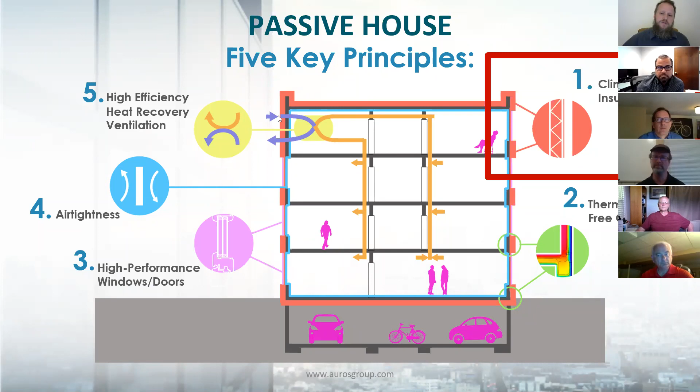So this week we're going to start with the first one, continuous insulation, and every 2 weeks we're going to do the remaining of those topics. And then after those topics are done, we're going to get on to something else, something we've either figured out folks are interested in learning, or we just decide on the next thing we'll talk about.

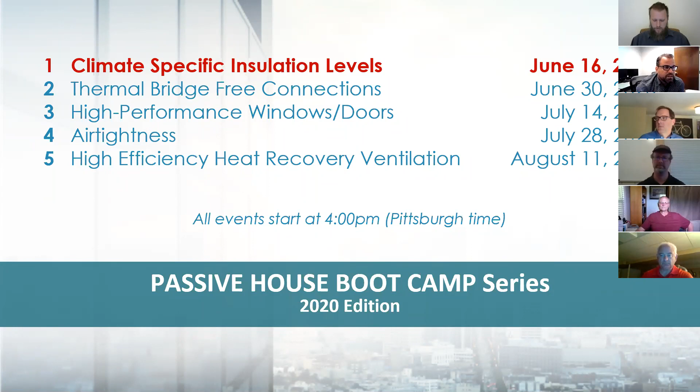The next presentation we have is built around thermal bridge-free connections. We have someone who is a Passive House certifier, highly trained not just for CPHD but also certification, and they'll show us some hygrothermal and thermal bridge analysis. We'll roll our sleeves up, look at some assemblies, bring it in, and play with it. That's intended to be a learning exercise, like hopefully today will be. So with that said, today is about continuous insulation and the thermal barrier. I will give screen back to Rob.

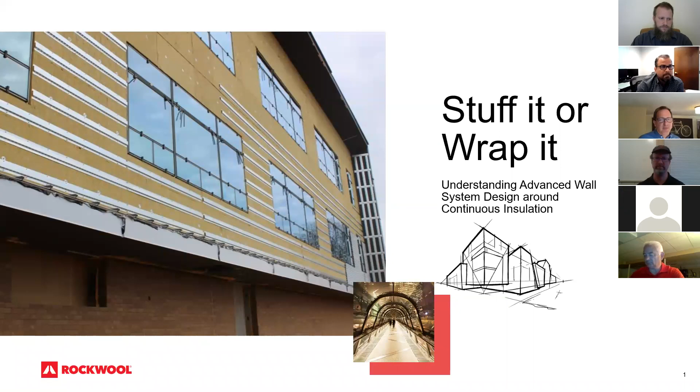We're here today to talk to you about understanding advanced wall system design around continuous insulation. We'll touch upon not only the continuous insulation aspect, but also air tightness and avoiding thermal bridges. I'm going to jump right into it so we can try and stay to 15 minutes, then you can pepper me with questions afterwards. This presentation is an excerpt from our full CEU that we developed with John Straub from RDH Building Science, so I've made it skeletal, trying to touch upon the points I think are most important for this audience.

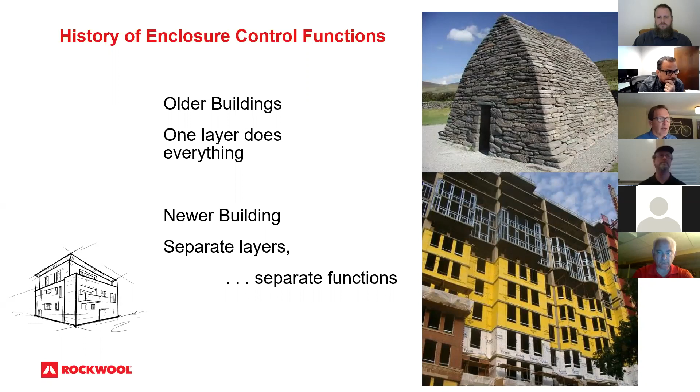When we look at building enclosure and control functions, we look back first. Hopefully we're all learning from our mistakes, even the ones from 1,000 years ago. Older buildings, like old stack stone masonry, had one building system that theoretically assumes all the functions we want: thermal control to some small degree, air control, water control, and vapor control. Of course, now the way we build is a bit different. We've got a ferroconcrete core, a substructure of LGMF that holds the sheathing, and then ultimately all these control functions that we've separated out, sometimes in one product, sometimes in a bunch.

We want to hit that 0.4 CFM for our blower door test. And then we look at thermal control. What I found over the years, working as a consultant and as a project manager, mostly doing design assist, is that all these products we use on the exterior substrate really rely on adhesion.

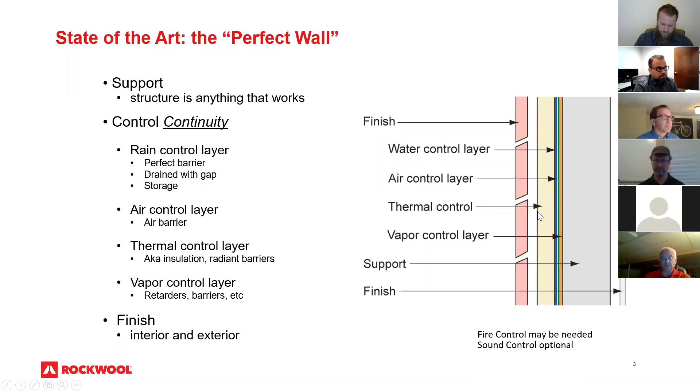So why are we doing thermal control? From a passive house perspective, it's about not only thermal comfort, but also air quality and keeping our spaces quiet. As we do those things well with our thermal barrier, hopefully we're also keeping surfaces at a moderate temperature.

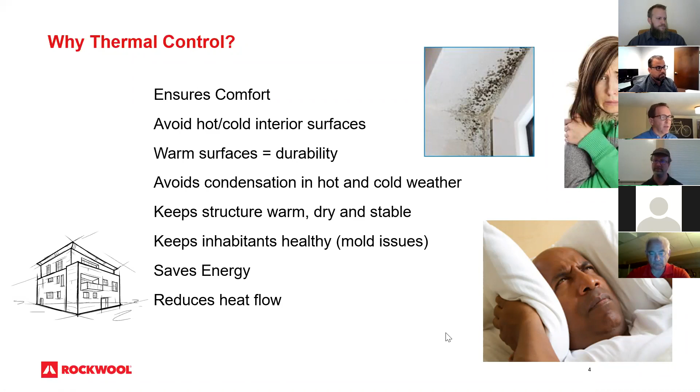We don't want exceptionally hot or cold surfaces, especially when it comes to our metal studs. If we have cold studs and hot moist air, that means we possibly have condensation in our wall sections, and this black icky stuff, or the degradation of the build itself. We see studs corroding or rotting depending on the material. But ultimately, if we're doing all that well, we should be saving energy and reducing heat flow.

When we look at thermal controls and the most important aspects of it, we see the movement of energy through our wall sections in three different ways. Conduction is the biggest one—thermal bridging. So those studs, our structural steel, our slab edges—the more dense the material, typically, the bigger a bridge of heat it is.

Then we look at convection—our air tightness. Second law of thermodynamics: heat's always moving to cold, wet's always moving to dry. When it does, it's taking energy along with it.

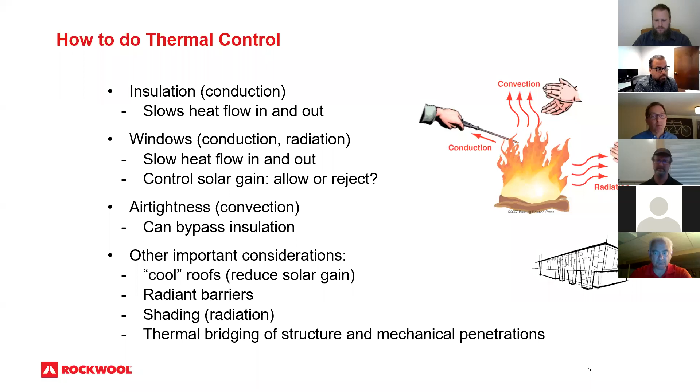And then thirdly, radiation—line of sight gain. Not as much a topic for this conversation, but certainly something we think about when we design. How do we face our buildings? Do we use passive shading measures? Are we using low emissivity coating? Or maybe not—maybe we want to benefit from that solar gain with a truly passive design in some instance.

So then we look at rated R value, or our overall thermal resistance terminology. Rated R value is this nominal theoretical static number set at 75 degrees. It doesn't do much for us except tell us what this material is doing at one temperature at one time.

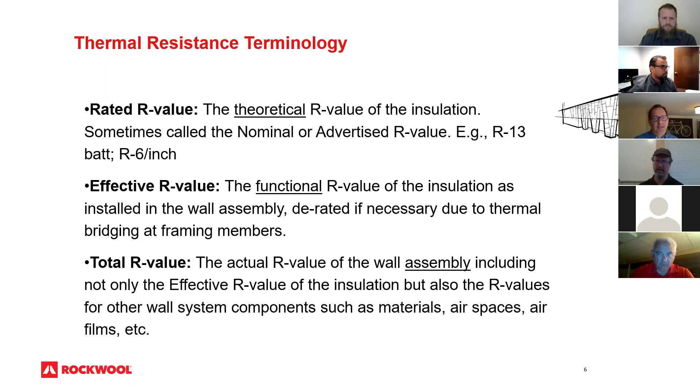We put that nominal value into use—we put it in a wall section. And then we realize, okay, we're derating this material for what's around it. How much thermal bridging is affecting that thermal barrier? Ultimately what we want to look at is our total R value—that effective R value, also taking into account all the other pieces and parts of the wall, our air films, our air spaces, the gypboard. That aggregate number is what we want to look at, our total R value.

When we look at that aggregate number and where we want to put our nominal R value—this is the nickname for the presentation that Dr. Straube gave it: stuff it or wrap it. Do we stuff it in the inner wall cavity, or do we wrap the building in that thermal barrier? The spoiler alert is that the answer is wrap it, not stuff it. But it's not always that simple either.

Oftentimes we're designing in urban environments. We have limited space—on the outside, a lot line and a setback, and on the inside, a client wants every bit of programming space they can get out of their dollar. So we've got some decisions to make.

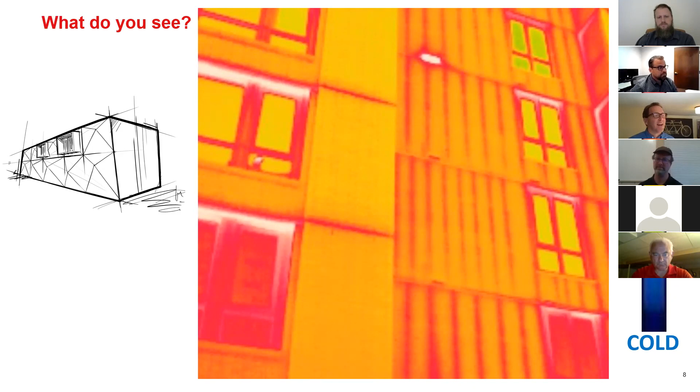The first thing we look at is thermal bridging. We look at some infrared imagery from a building in New York, maybe six or seven code cycles ago. Clearly no continuous insulation—we can see all that loss in the red and the yellow. The studs, the window frames, which clearly are not thermally improved.

Our relieving angle on that masonry column—all of those are big culprits for loss. As we moved along, maybe now three code cycles ago, we're looking at the use of some continuous insulation, the basics from ASHRAE—probably an R10 on the outside, the use of a non-continuous attachment system, so clips instead of rails, or instead of continuous Z-shapes. We can still see the trace of that slab edge conducting heat, and the surface penetrations, which aren't thermally broken. Then, of course, for some reason on the left side of this elevation, we see some continuous Zs, and that shows it takes that heat straight through the studs, right out through the Zs.

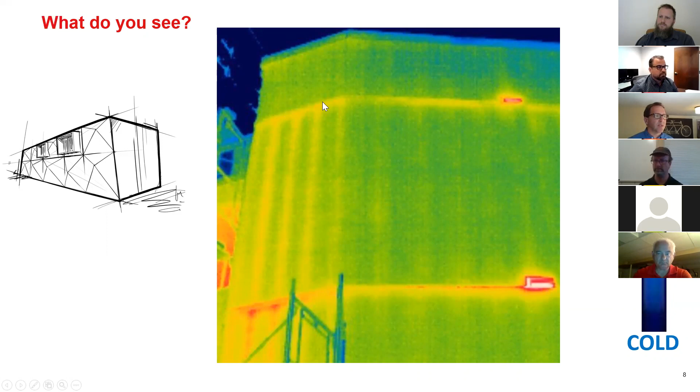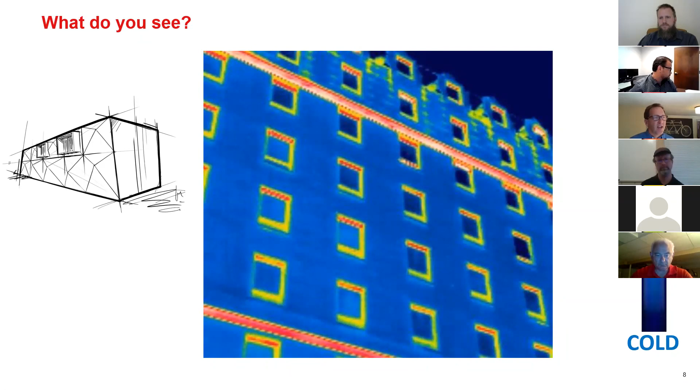This is actually an EIFS building. I don't typically promote or applaud EIFS as a solution, but it's really the first iteration of an effective continuous insulation solution. Of course, it worked a little better in the EU than it did here, at least in terms of details, and we can talk about the nuts and bolts of that later on.

So when we look at thermal bridging and what its real effect is, if we take our very typical commercial build, 16 on center LGMF studs, 2x6 wall, we can fit an R23 bat product in there. But if we derate it, what we actually have, our effective R value there is an R10. So not highly effective to use that thermal barrier in that inner wall cavity.

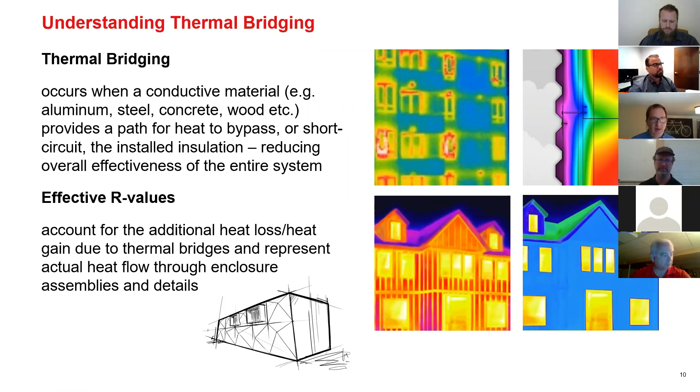Even with a residential build with wood construction, we still see up to 25% loss. And then we start to take account for the rest of the structure, right? All of this steel, we know that we can't get to the numbers, whether we're talking about basic code or let alone passive house levels, by only using that thermal barrier inside.

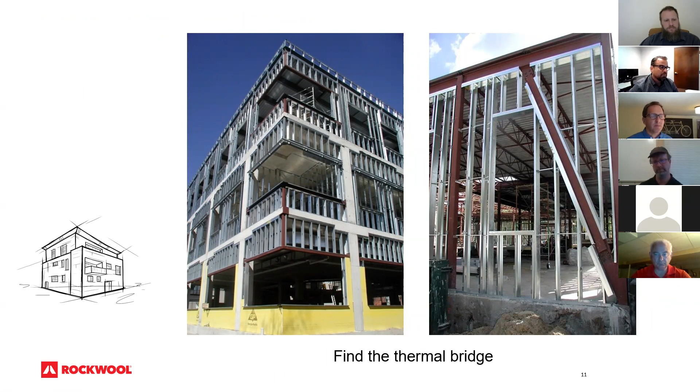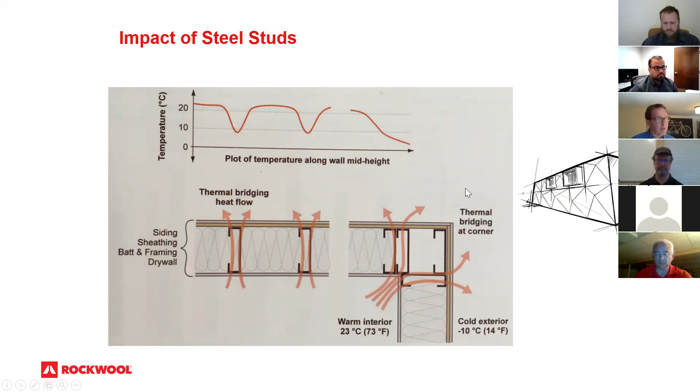So clearly, we have to use some continuous insulation to make this work. When we look at the impact of using that continuous insulation, if we use as a starting point the best we could do by filling the wall full of insulation, and then start to add continuous insulation on the outside, what we find is that as we buy continuous insulation, we actually get more than we buy, because we're improving the performance of the insulation on the inner part of the wall.

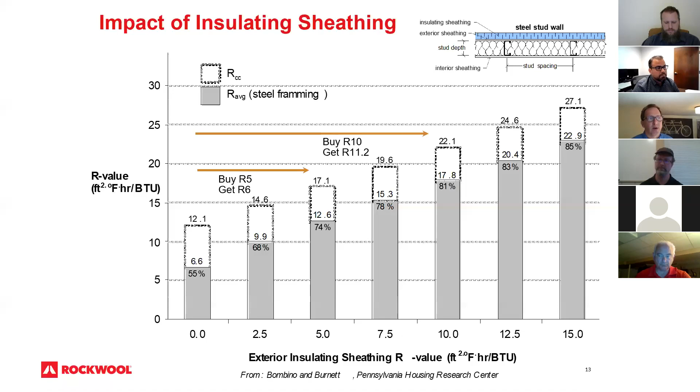So if we're buying R5, we're actually getting an effective R6. If we're buying R10, we're getting 11.2. And that curve keeps on going, and it really doesn't flatten out until we're well into passive house values in terms of insulation in the R50, R60 range. So the message here is that effective R value is the performance of the entire assembly, not just the material.

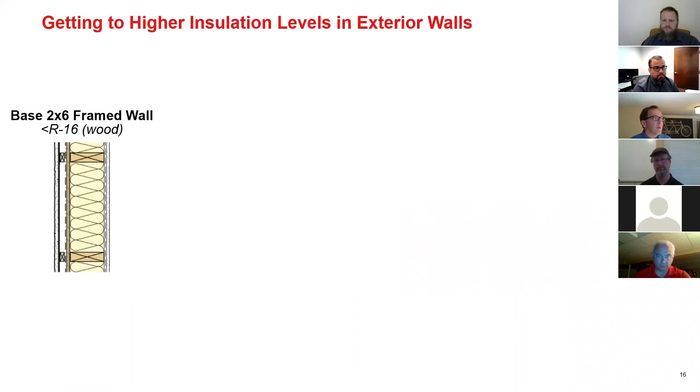As we start to look at getting to higher insulation levels and look at some different solutions, we've got a number of things to consider when we're using exterior insulation. What is its permeability? If we're talking about a typical passive house detail with a double stud wall and a lot of dense packed cellulose, we need to be aware of what's happening with moisture there.

If we're doing adaptive retrofits or adaptive reuses and we're insulating formerly uninsulated masonry walls, what's happening with that moisture, and at what point, especially in the winter, is that moisture getting trapped in those scenarios and potentially becoming destructive? And then what we typically see for a highly insulated wall is this split insulation scenario.

So we've got some rules of thumb on ratios of effective R value inside and out, as well as definitely a need to use a vapor permeable membrane between those two assemblies.

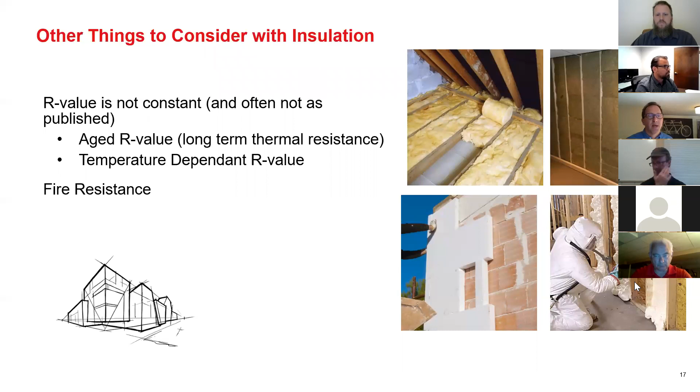Other things to consider specific to insulation are that R value isn't constant, right? As I said, it's established at 75 degrees, but as temperature changes, R value typically goes up with the exception of a couple of materials. Also aged R value, there is thermal drift, so some materials' R value changes over time. And then of course, depending on what we select for material, fire resistance is a big component.

When we're talking about the exterior insulation, that continuous insulation, we're usually talking about stone wool, polyisocyanurate, or extruded polystyrene. In some cases, also looking at Gutex or something like that, but these are the big three that we see in commercial builds.

What we find is that materials that are fibrous insulation get their R value from trapping air. Rock wool does, Gutex does, other mineral fibers do, but thermoplastics get a piece of their R value from blowing agents in the manufacturing process. Over time, those blowing agents either off gas or phase change, and when they do, their efficacy changes. So ultimately, we all kind of live in the same effective R value boat.

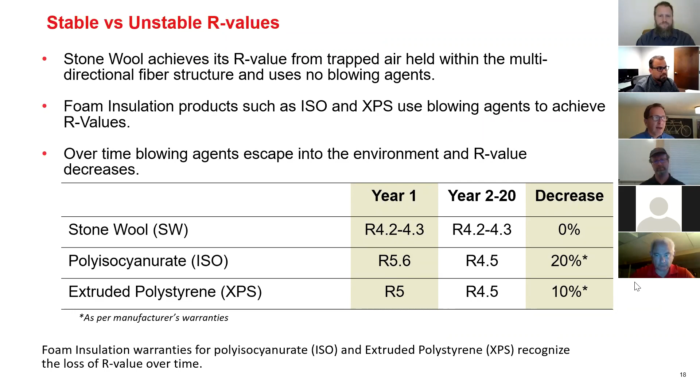This is just a little bit of excerpted warranty language from thermoplastic manufacturers and thermoset manufacturers on what to expect in the long term with those materials. I'm going to let Michael speak to the roofing aspect of this, because it's a little bit different, a different animal, and more in his wheelhouse in terms of expertise.

Robert's already kind of set the table on the performance of foam plastics versus that of those products that trap air. As commissioning started to come into play, the National Roofing Contractors Association took it upon themselves to test foam plastic, specifically polyisocyanurate foam, but rather than at just 75 degrees mean Fahrenheit, they tested it using ASTM C518, which measures thermal performance at 25, 40, 75, and 110.

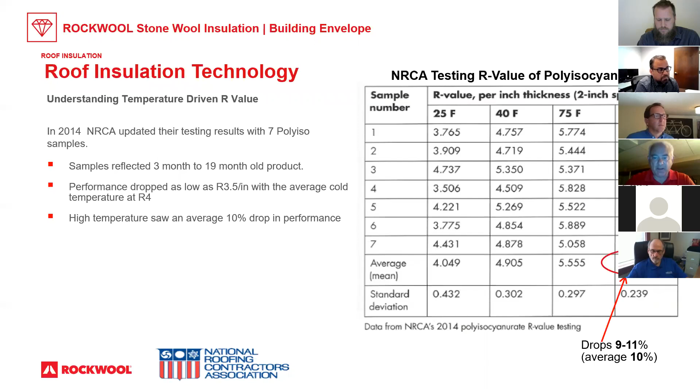If I take this chart and graph it, what you're going to see is basically the sweet spot for foam plastic at 75 degrees, providing an R value of 5.6 to 5.7. Stone wool for the roof is around 3.8, for the walls more like 4.3. But as temperature changes, you'll notice those lines basically cross. At 25 degrees, stone wool actually outperforms isocyanurate foam. So for passive house construction, when you're looking at long-term performance, it obviously makes more sense to use something that traps air versus a foam plastic.

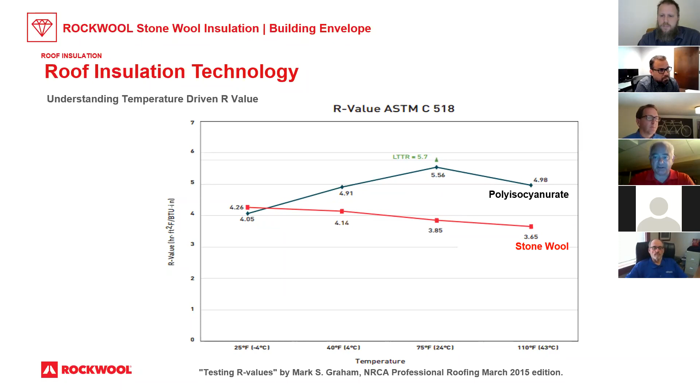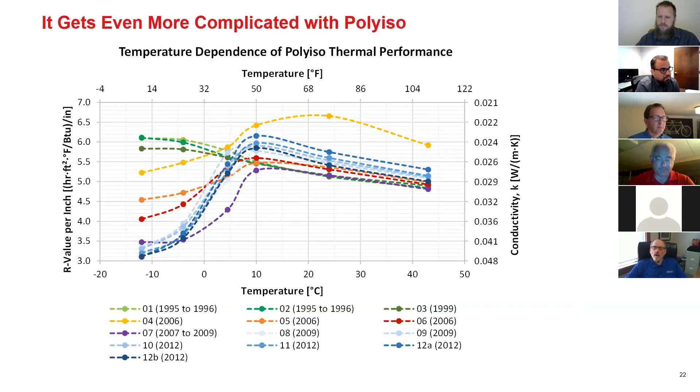So as we look at this, it's not just thermal barrier. As we start adding more and more thermal barrier, we need to think of what the rest of the assembly looks like. For passive house, that typically looks like a drain rain screen assembly. We know that we need a good continuous plane of drainage to control water, and to pay close attention to those penetrations and openings where we have transitions.

That also contributes to good air tightness. We also want to allow for maximum drying potential of that wall in case of heavy weather events, or accidental introduction of water. So we want, ideally, vapor permeable products for that thermal barrier. As we're providing that continuous insulation and good continuous air barrier, we should be doing a good job of controlling condensation problems and decreasing our energy consumption.

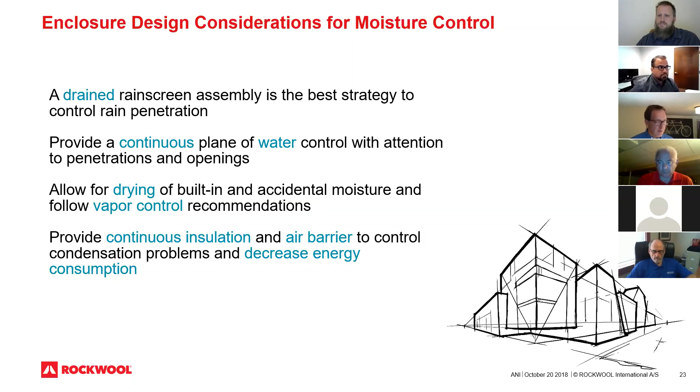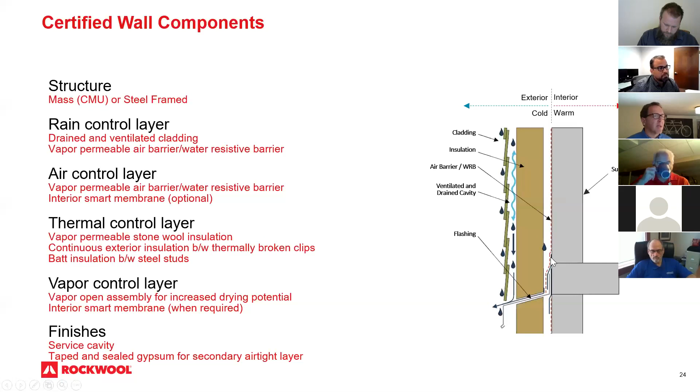The one thing I want to throw out there, and we can talk about this in a little more detail in Q&A, is that if we have a split insulation scenario, we want to make sure that the water-resistive barrier behind the insulation is something that's vapor permeable. We can talk a little bit more in detail about that as we move on.

So we'll quickly look at choosing a cladding attachment system. There's no sense in putting a ton of insulation on your building if you choose cladding attachment systems that are going to allow a ton of thermal bridging, right? So we'll look at masonry real quickly. We see a transition from the use of carbon steel brick ties to stainless steel brick ties. They're about half as conductive as carbon steel, so 100% more efficient.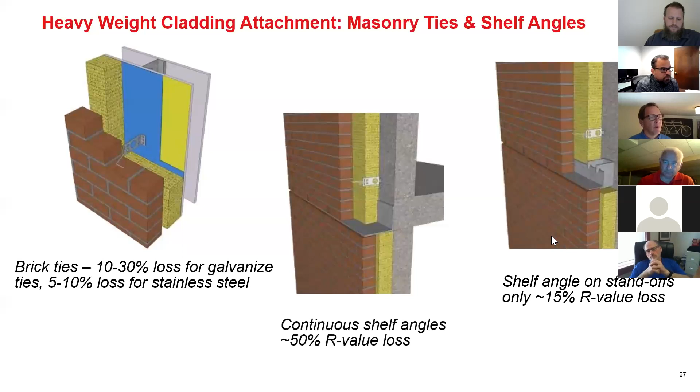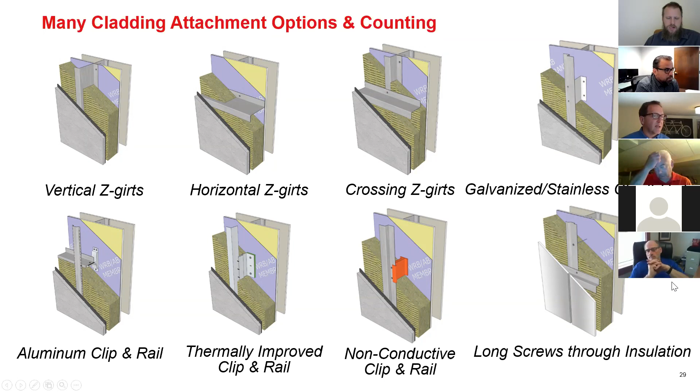Those continuous shelf angles, which are good for 50% aggregate loss, not just localized loss, have been replaced with the typical shelf angle standoff or a thermally broken structural element. When we look at all these different cladding options, these are kind of the top row here, the old school continuous rails, and even down to aluminum clip and rail systems are relatively inefficient. We're going to look at these three thermally broken and screw-through systems as the more efficient options.

What we need to know about those as options is if we're using a clip and rail system of any kind, the material that we use with it, the insulation material, wants to be semi-rigid so that it can conform around all those details of hardware, or spray foam, not as typical in this marketplace, but every once in a while I see spray foam on the outside of a building.

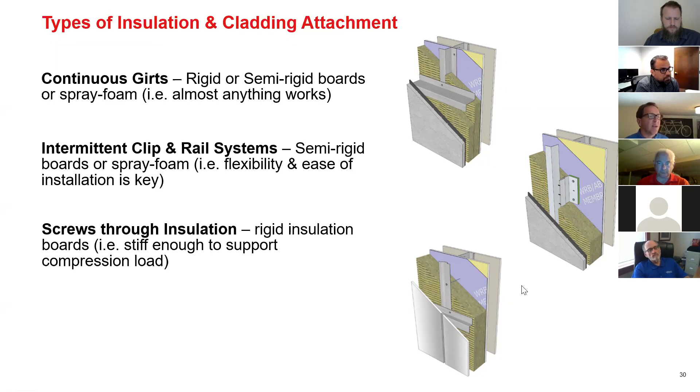And then if we're looking at a screw-through insulation, so the only thing going through that insulation is the fasteners for a girt system, we need to make sure that that material is rigid enough to handle the, has enough compressive strength to handle the load that we're applying to it.

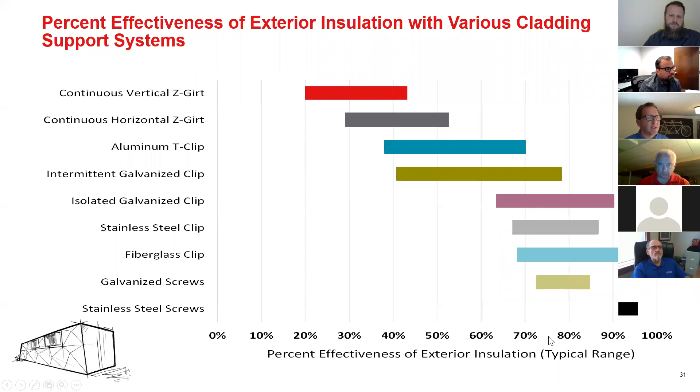And this is a real basic rundown of what each of those assemblies looks like in terms of efficiency. And we see a big spread in all these because of the amount of clips that you might have to use to accommodate the load.

So we look at clip and rail systems. This one's from Knight, it's their MFI system, so somewhere between 60 and 90% efficiency. And as I said before, the difference in efficiency revolves around how many of these clips are we using. The more metal we pass through that insulative barrier, the less efficient it is.

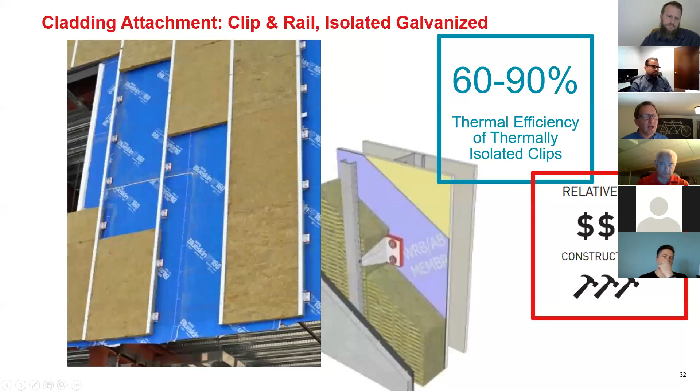So heavier loads are going to be less efficient. We also put in a relative cost factor, and then more dollars means more dollars, and more hammers means easier to build.

We look at fiberglass clip and rail systems. This one happens to be Cascadia, there are a few others out there. You probably know Cascadia in the passive house world because oftentimes their windows are looked at along with these clips because they don't use aluminum, they use these pultrusions, and they have much higher R values than typical fenestration. But what we see is 70 to 95% efficiency, about the same relative cost and constructability as typical clips.

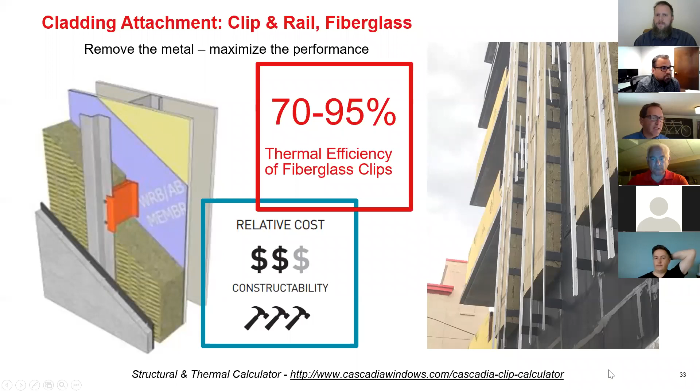And they do have a pretty interesting tool on their website where you can do a clip calculator that allows you to turn the knobs of your R value, your cladding weight, and the amount of clips that it's going to take to get you there, which then again also informs the levels of efficiency.

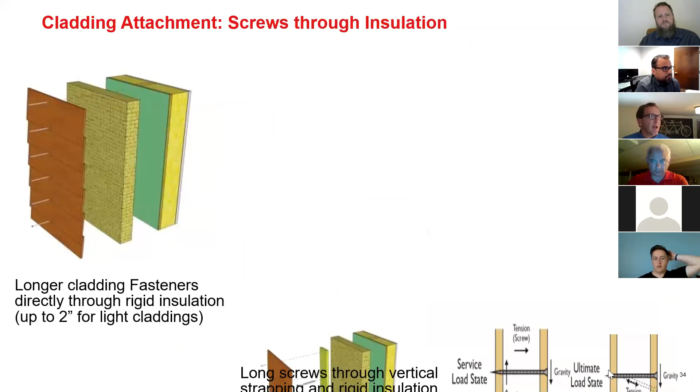And then when we look at screw-through systems, we have a couple different options. So a very light cladding, a residential type application, fiber cement plank type system, we can go right through the plank, right through 2 inches of rigid insulation, or right into the substrate.

Anything heavier than 5 pounds a square foot wants to utilize a vertical girt. That vertical girt, in conjunction with those fasteners, basically becomes a ladder truss. So that's how it's able to assume higher loads. So we can load up to 15 pounds a square foot.

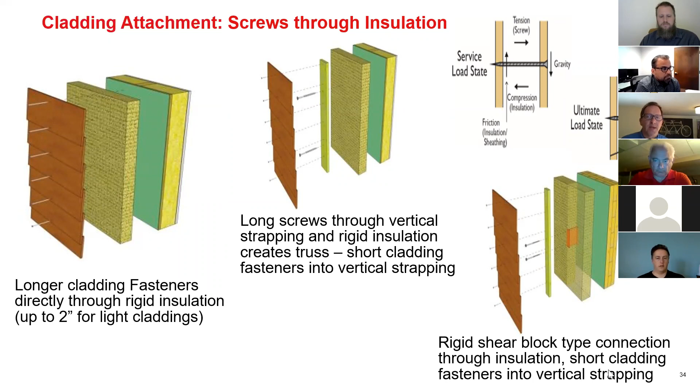And anything above that probably wants to look at using a rigid shear block. For my money, I'd probably go back to a clip and rail system rather than try to incorporate a rigid shear block in a screw-through system. But these are the levels of efficiency that we see.

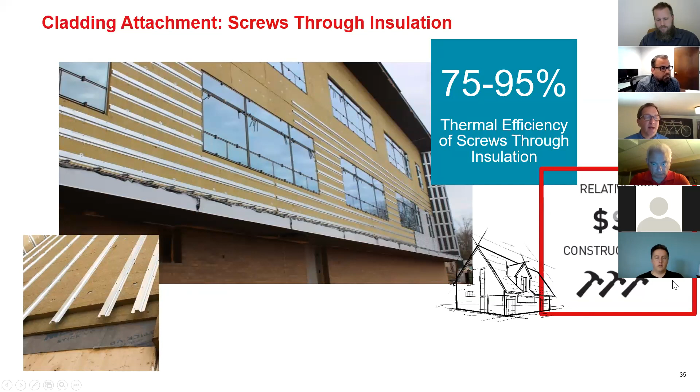So up to 95%, the 95% end of things is informed by the amount of fasteners. We do see thermal conductivity through those fasteners because they're pretty robust, anywhere between 3/16 and 5/16 of an inch. But we also see a relative cost drop because we've eliminated a layer of hardware. And in terms of constructability, it's really not a heck of a lot different than what we see with the typical clip and rail systems.

And then a real basic metric, what is our backup that we're attaching to? Are we going to wood? Are we doing mid-rise wood, typical steel stud backup, or unitizing and going to concrete or block backup? And then what's the weight of the system that we'd like to attach, and some best practices on that.

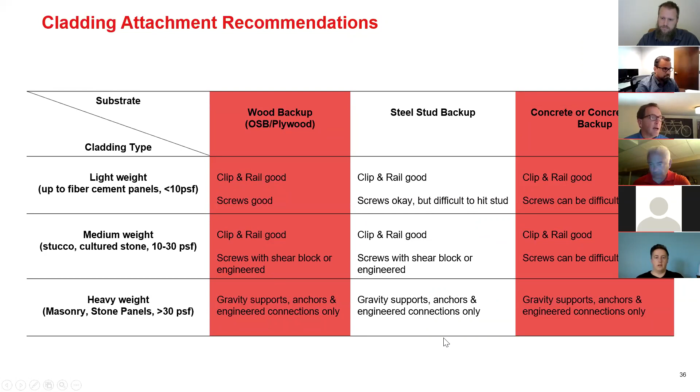My history in the enclosure space is that I spent about 8 years consulting with Gordon Smith Corporation in New York City, a lot of curtain wall, a lot of fenestration testing to the destructive point, running fenestration products and cladding products into testing to enter the marketplace. I also spent a lot of time as a project manager doing design assist, working with folks like yourselves to build a better mousetrap.

I'll let Michael speak for himself, but Mike is kind of the roofing guru at Rockwool that's come over to the wall side for the Mid-Atlantic. Thanks, Robert. As Robert said, I've taken over pretty much the Pittsburgh market as well as the entire state of Pennsylvania. I have probably 27 years in the commercial roofing industry working for major manufacturers. While I'm new to walls, I'm not new to construction, so I'm a resource for the building envelope. If I can be of any help, I will be more than happy to assist. If I don't know the answer, I'll tell you I don't know, but I will find the answer and get back to you. So having said that, I'm going to turn it back over to Craig.

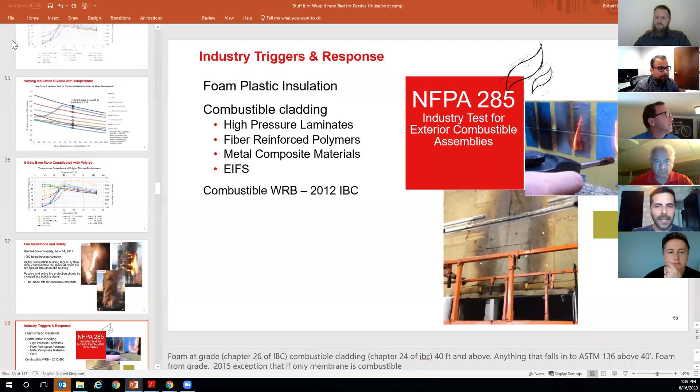Roberto, you're up. Quick question about — thanks for the presentation, that was really informative. My question is around sustainability and product performance: are there any environmental product declarations or ingredient disclosures, any red list declarations, the big kind of debate?

The big three, sure. So we have EPDs on everything, third-party EPDs, newly released to reflect the product specifics. There used to be more general, industry-wide EPDs, like from NAIMA. We are red list free and also Green Guard Gold declare, so we check most every box when it comes to sustainability.

I often get questions about carbon embodiment too, especially from the passive house community, since depending on project motivations, there's sometimes a desire to encapsulate some carbon in the design. We sit in the middle of the road on that — we're not a cellulose product, but compared with most other products in the industry, we're in a pretty good spot, and we're working towards circularity efforts. By the time buildings put stone wool in today get turned around, we plan to have circularity in place. It's already happening in Europe; we're a little behind here in the US, but we plan to have a program where that material can be recycled.

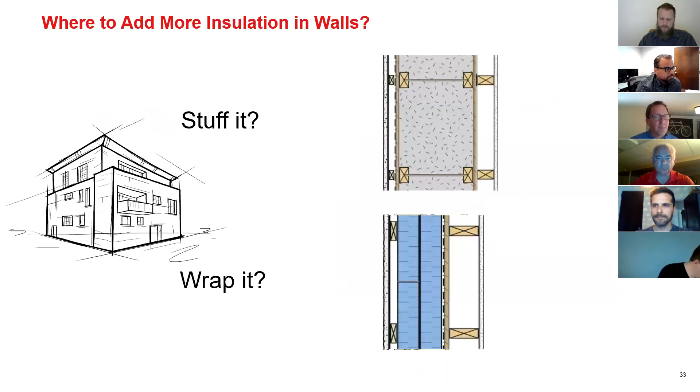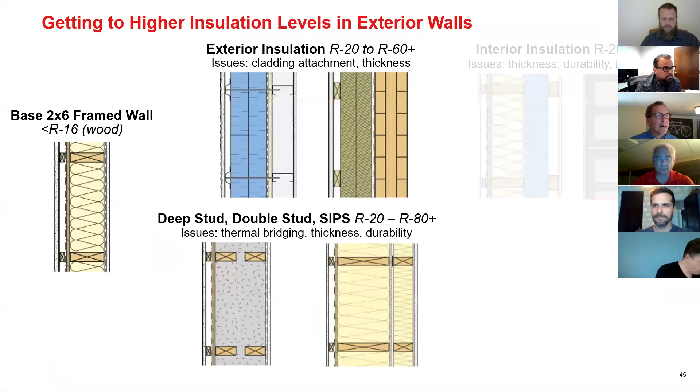Let me get up to the split wall assembly slide. By the way, I'm happy to share this — some of you may have seen my presentation at Passive House Western PA in November. I'm happy to share the full deck as a PDF for reference as well.

If we look at split insulation scenarios, typical for urban environments, we want a vapor permeable barrier between the exterior and interior wythes of insulation, and the exterior insulation itself must be vapor permeable so we don't trap water behind it. A rule of thumb for split insulation is to aim for an effective R-value roughly half and half as a conservative number — the more you put outside the better, but you don't want to cross that 50-50 barrier.

Looking at a more code-specific application, if we have R10 on the outside, which is what ASHRAE calls out for a prescriptive insulation scenario, depending on your climate zone, you'd have R13, R15, or R19 on the inside.

So we know that whatever that inner number is will be derated for studs, and let's say it's R13, it's going to end up being R6, and the effective R value on the outside is R10, so we're okay. But those are some basic rules of thumb in terms of what we're doing with split insulation scenarios.

And then most times, especially for a passive house build, we're looking at an interior vapor barrier too, typically a smart membrane, right? A Siga, Pro Clima Intello or CertainTeed MemBrain, one of those smart membranes that allows for moisture to pass out of the wall back into the conditioned space, but won't allow moisture to go into and accumulate in the wall.